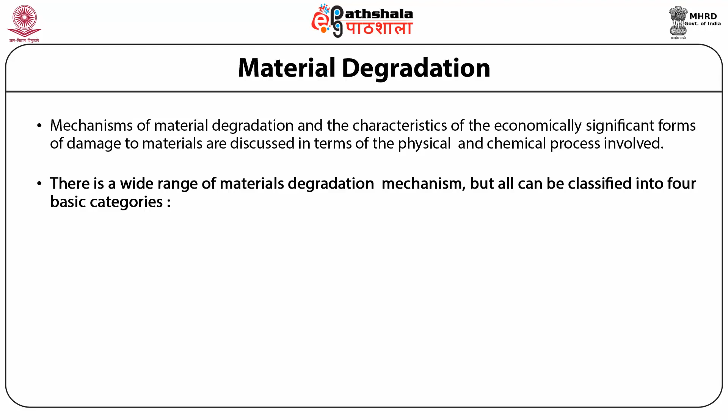Material degradation. Mechanisms of material degradation and the characteristics of the economically significant forms of damage to materials are discussed in terms of the physical and chemical processes involved. There is a wide range of materials degradation mechanisms, but all can be classified into four basic categories. First, by direct mechanical action, second, by heat or radiation, and third, by the presence of chemical reagents.

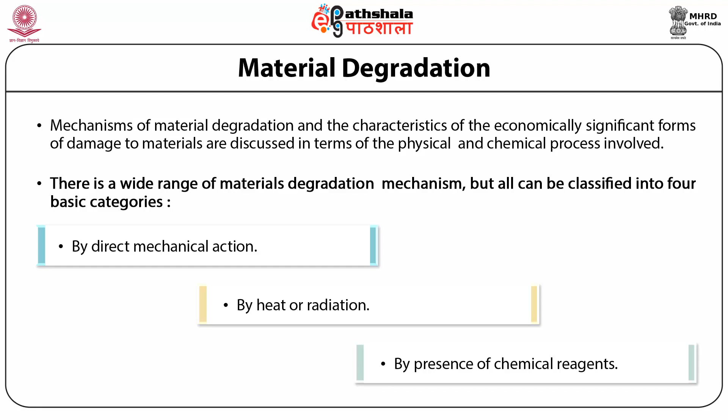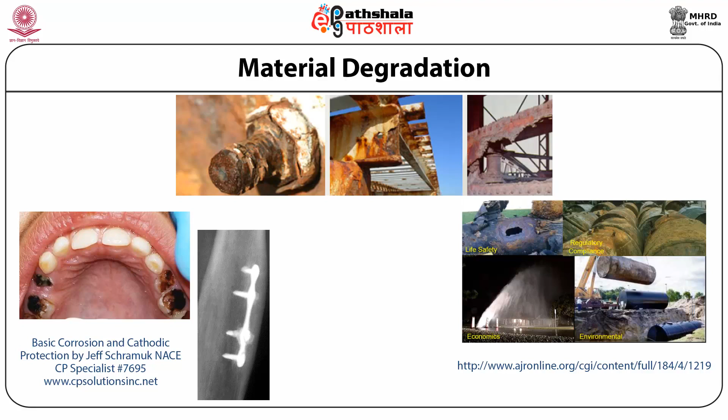So students, these are the figures showing the effect of corrosion in various fields. As you can see over here, the first figure corresponds to life safety. Second, corrosion in regulatory compliance. The next in economics. And the last figure is in the environmental. And the left-hand side figure shows a radiograph of corrosion of screws in a retained surgical plate placed 40 years earlier for a femur fracture, and fuzzy debris around the screws.

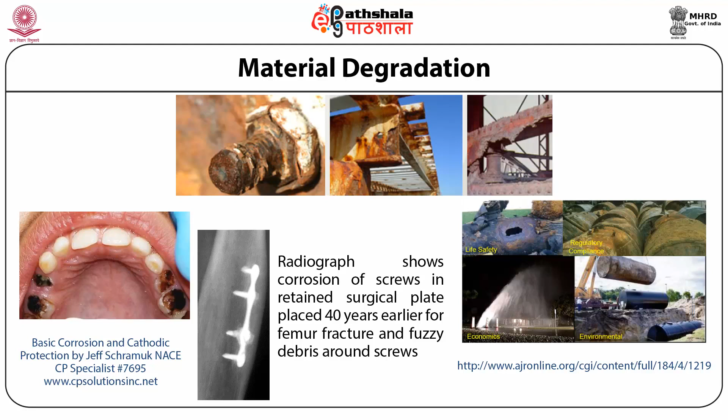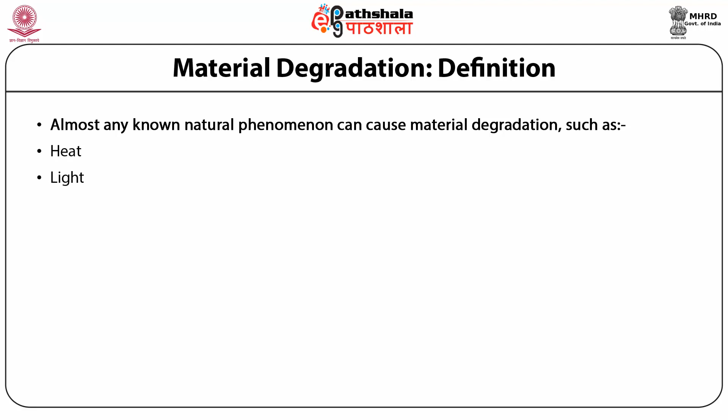Almost any known natural phenomenon can cause material degradation, such as heat, light, short wavelength electromagnetic radiation, radioactive emission, chemicals, mechanical stress, and interaction with bacteria, fungi, or other life forms. Classification of materials degradation according to its basic cause is a first step in any plan to protect a specific material in a specific situation.

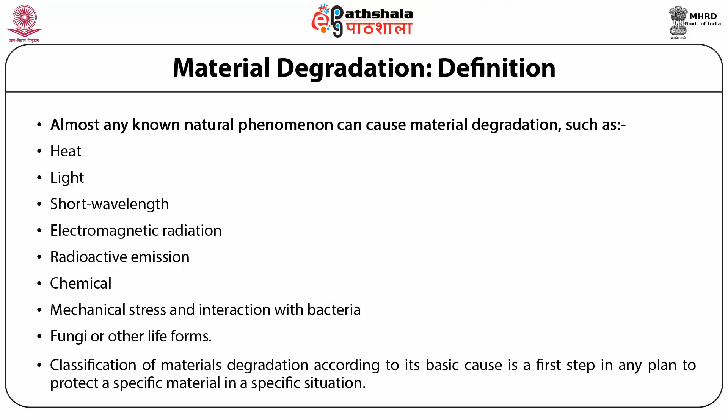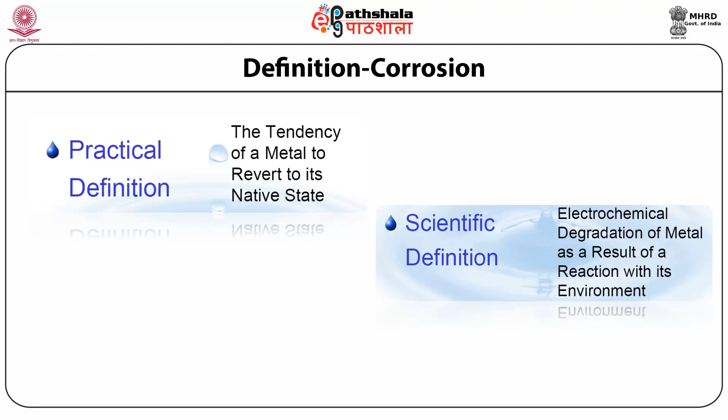Now students, let us discuss the definition of corrosion. The practical definition of corrosion is the tendency of a metal to revert to its native state, whereas the scientific definition is the electrochemical degradation of metal as a result of a reaction with its environment. So continuing our discussion of the definition of corrosion, it is the destructive attack of a metal by chemical or electrochemical reaction with its environment. Corrosion returns the metal to its oxidized or combined state in chemical compounds that are similar or even identical to the minerals from which the metals are extracted.

So, considering aqueous corrosion, that is Zn + 2HCl gives ZnCl2 + H2, 2Al + 3H2O gives Al2O3 + 6H+, whereas in oxidation we have 4Fe + 3O2 gives 2Fe2O3. In high temperature corrosion, Fe + CO2 gas gives FeO + CO, and rusting corresponds to 2Fe + 2H2O + O2 gives 2Fe(OH)2, whereas 4Fe(OH)2 + 2H2O + O2 gives 4Fe(OH)3. So corrosion resistance can be affected by metallurgical, electrochemical rate, mechanical, and thermodynamic factors.

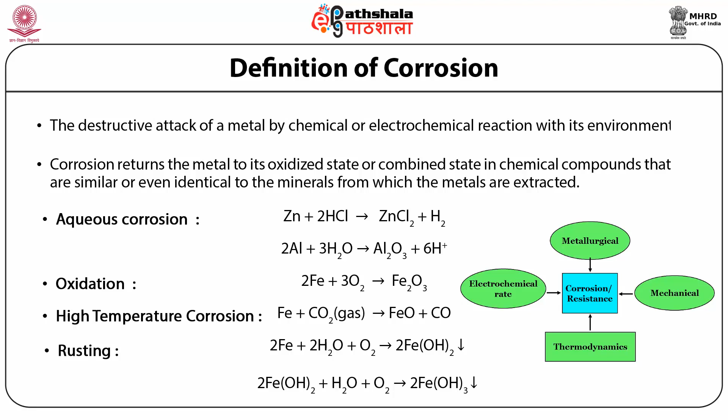Now let us discuss the electrochemical nature of corrosion. Consider when a zinc metal or a zinc rod is immersed in hydrochloric acid. Visibly, hydrogen gas bubbles form on the surface of the zinc rod, and then gradually zinc loses its mass in the form of zinc ions in the solution. That is, the reaction can be written as Zn plus HCl gives ZnCl2 plus H2.

If the above reaction is written in the form of half cell reactions, two different reactions occur in order to maintain the electrical neutrality. One is the cathodic reaction, where electrons are accepted by the hydrogen ions present in the acid solution. The other reaction is the anodic reaction, where electrons are generated from the zinc atoms for the supply of electrons required for the cathodic reaction. This is needed to maintain the charge balance.

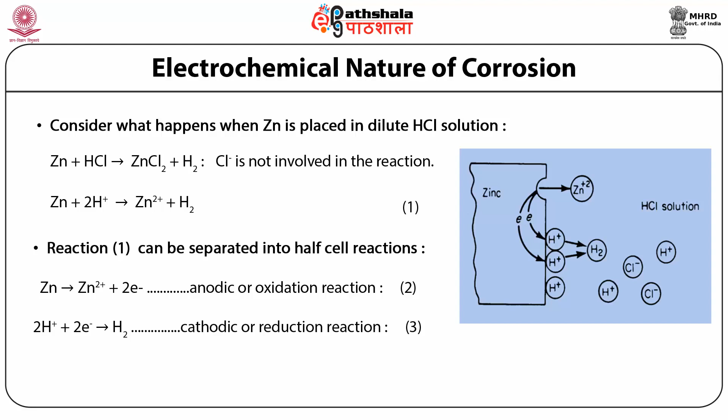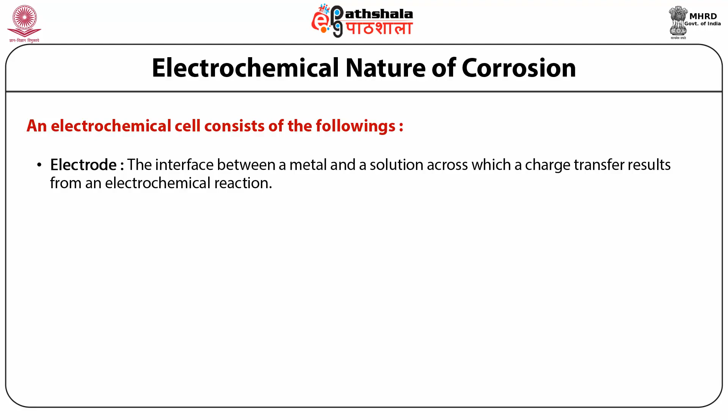So, from the discussion we have done till now, the electrochemical cell consists of the following: the electrode, that is the interface between a metal and a solution across which charge transfer results from an electrochemical reaction. Next is the anode, the electrode on which the anodic oxidation reaction occurs. The cathode, the electrode on which a cathodic reduction reaction occurs. And lastly, the electrolyte, an ionic conductor.

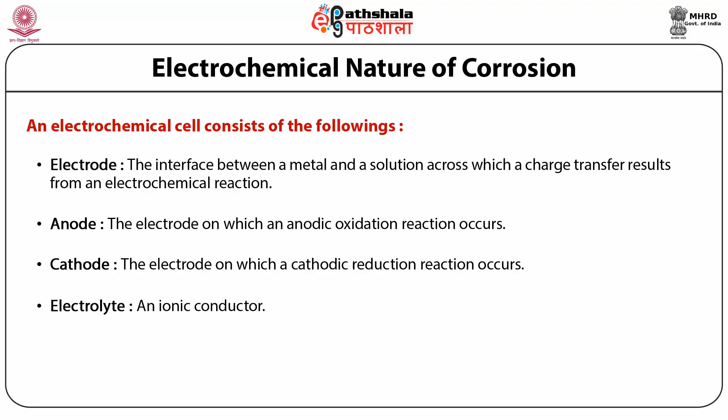So, students, let us now discuss the basic parts of a corrosion cell. First, the anode, a metal electrode in contact with the electrolyte which corrodes. Second, the cathode, a metal electrode in contact with the electrolyte which is protected against corrosion. Third, the electrolyte, a solution or conducting medium such as soil, water, or concrete which contains oxygen and dissolved chemicals. Lastly, we have a metal path, an external circuit that connects the anode and the cathode.

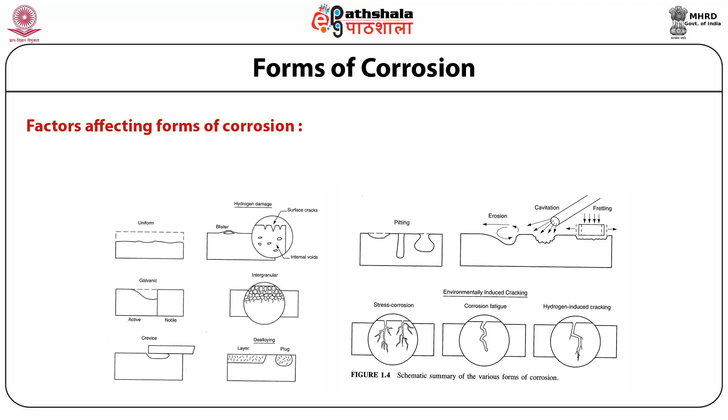So, this shows the different forms of corrosion. The factors affecting the forms of corrosion are the microstructure, environment, stress, geometry, and time. As you can see from the first figure, we have hydrogen damage. We have a uniform surface, and on the right hand side of the figure, there is a formation of internal voids and surface cracks. The next figure, we have galvanic, where we have intergranular. The third figure shows crevice, and on the right hand side of the figure, there is de-alloying.

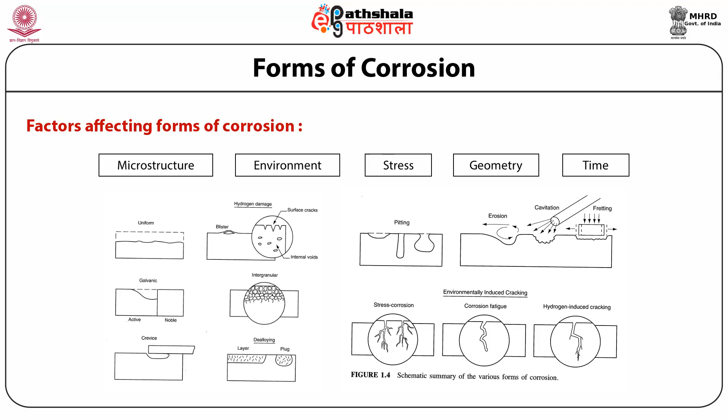Now, on the right hand side, we have the different environmentally induced cracking, and in the below figures, we have stress corrosion, corrosion fatigue, and hydrogen induced cracking.

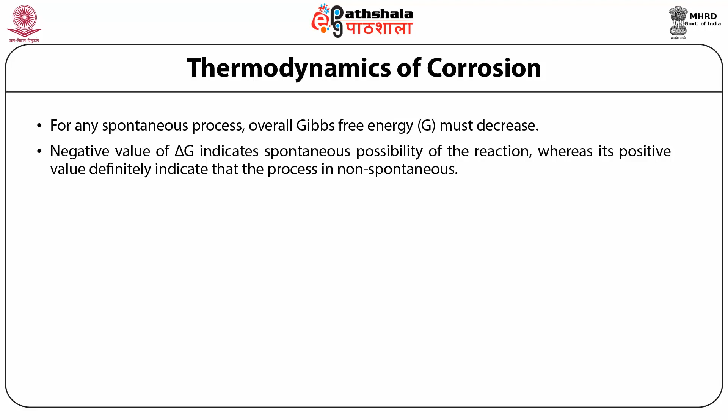For any spontaneous process, the overall Gibbs free energy, G, must decrease. A negative value of delta G indicates the spontaneous possibility of the reaction, whereas a positive value definitely indicates that the process is non-spontaneous. When the change in free energy is zero, it suggests equilibrium.

Free energy change for any electrochemical reaction is calculated from the following equation: delta G = -nFE, where delta G is the free energy change in joules, and n, F and E are the number of electrons involved in the reaction, Faraday's constant, and cell potential in volts respectively. If standard state is maintained, then the above equation can be written as delta G° = -nFE°. The right-hand side of these two equations contains the negative sign.

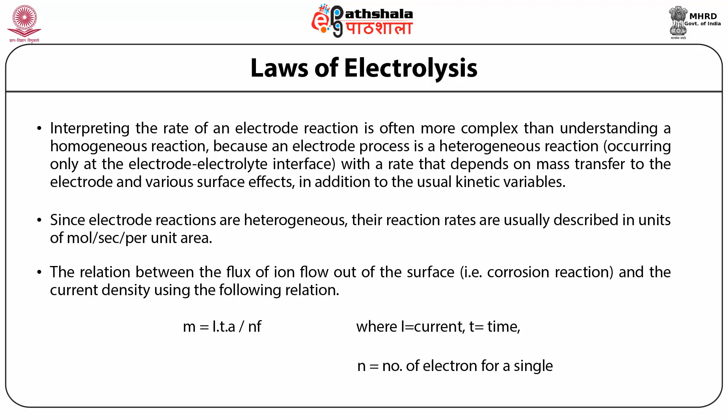Since electrode reactions are heterogeneous, their reaction rates are usually described in units of moles per second per unit area. So the relation between the flux of ions flowing out of the surface, that is the corrosion reaction, and the current density uses the following relation: M = ItA / nF. I is the current, t is the time, n the number of electrons, and A is the area of cross section.

So I multiplied by t is equal to the total charge. It divided by nF is equal to the moles electrolyzed. ItA divided by nF is equal to the total mass. So rate is equal to dm/dt. So M / tA = ia / nF. The above expression shows that the rate of corrosion is related to the current density.

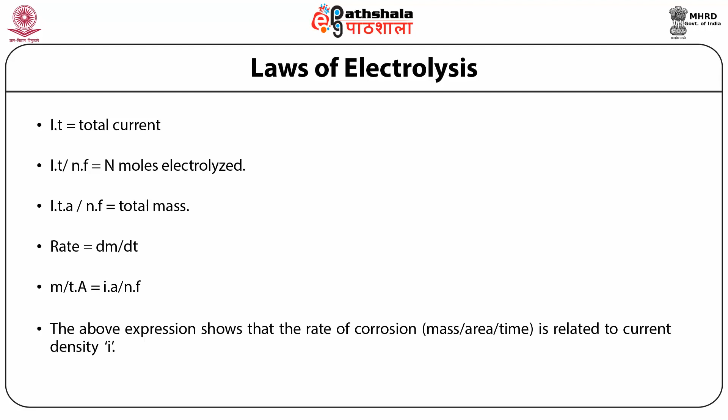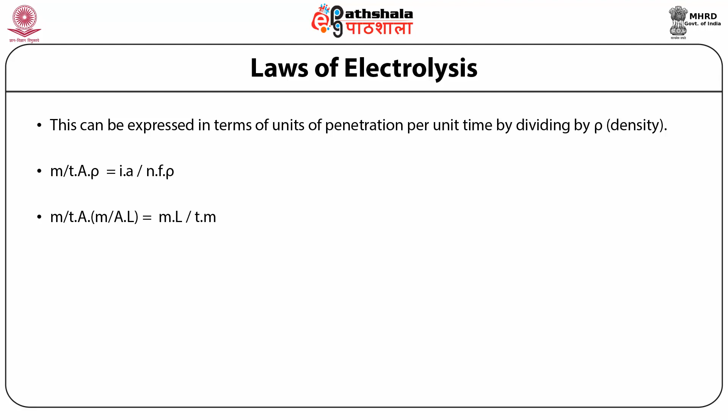This can be expressed in units of penetration per unit time by dividing by rho. So M / tAρ = ia / nFρ. So M / (tA × M/AL) = ML / tM, which is equal to L/t. That is the unit of penetration per unit time.

For more than one anodic reaction and more than one cathodic reaction, the current is such that the summation of Ia is equal to minus the summation of Ic. Ia corresponds to the anodic reaction and Ic corresponds to the cathodic reaction.

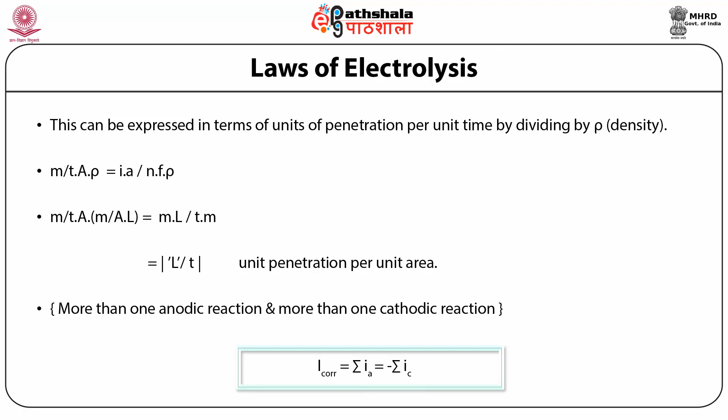So students, let us summarize what we have learned in this module. First, material degradation along with its basic types and material degradation due to natural phenomena are all discussed. Second, the fundamentals of corrosion, including its definition, the electrochemical nature of corrosion, and its different forms are discussed. Thermodynamic and kinetic analysis of corrosion are also explained in detail.